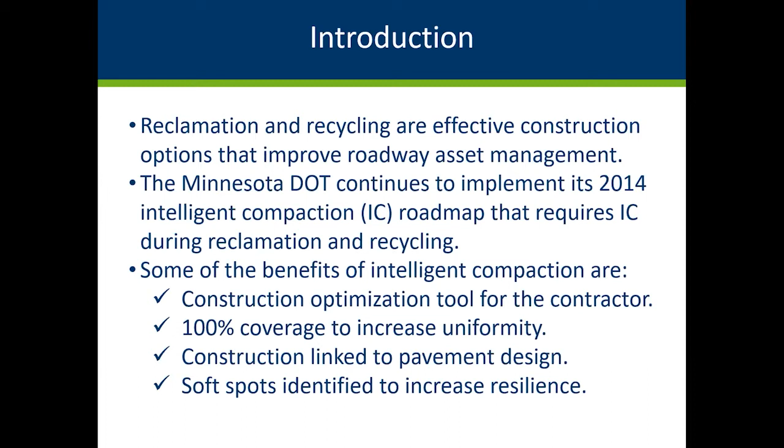The opportunities, I'll talk about six things, with a couple slides on each: eliminating unsafe testing, addressing national priorities, enhancing roadway resilience, demonstrating innovation, improving asset management, and increasing cost effectiveness. So what do I mean by unsafe testing?

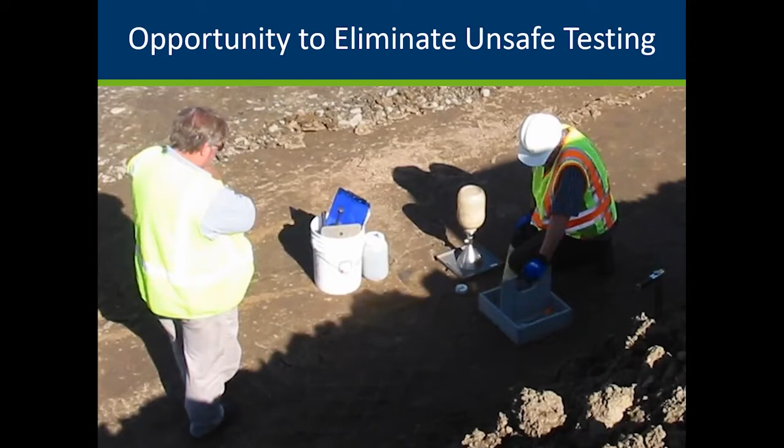When I first got involved with this a couple decades back, I had been doing construction testing as an intern during school, came to the DOT, and we were doing a lot of density tests. I was very familiar with these tests, and our construction engineer for the state of Minnesota was very interested in getting rid of, or at least providing options that would reduce the danger for inspectors doing these tests. We'd actually had inspectors, at least one killed and several injured, being down on the ground for many minutes doing this work. So a huge initiative was: can't we replace this unsafe testing? We in fact moved pretty fast and got that done, providing a couple options: the dynamic cone penetrometer and the lightweight deflectometer.

As far as addressing national priorities, all the DOTs have been actively working to address what was passed by Congress, MAP 21 in 2012, and subsequent federal highway bills have reinforced the need for measured outcomes that are performance-based. So what I'm going to speak about today are what tests, what processes can we put in place that are much more performance-based, linked to design, linked to long-term performance, and that's all essentially mandated by Congress.

And then by the rules that Federal Highways puts in place. The Society of Civil Engineers was already mentioned - they have professional standards as well as AASHTO. So all these important professional organizations are encouraging us to move expeditiously towards these goals. As far as asset management plans, we're familiar with the rules that have been adopted by Federal Highways that are posted in the Code of Federal Regulations.

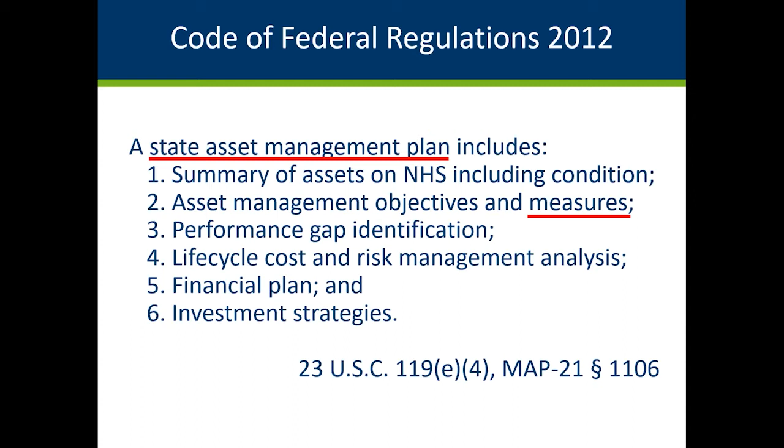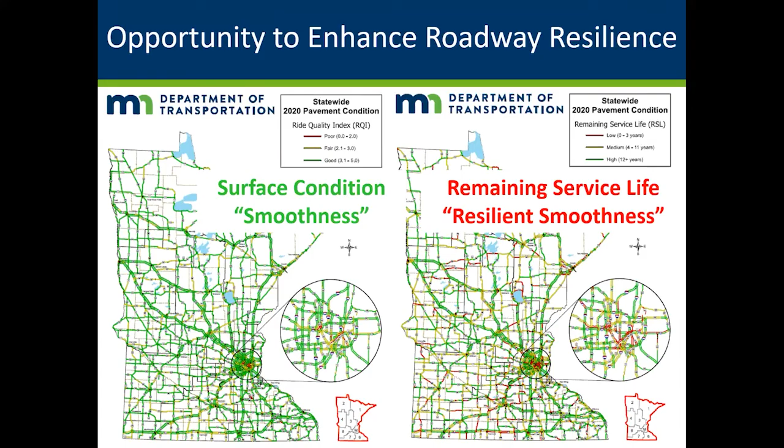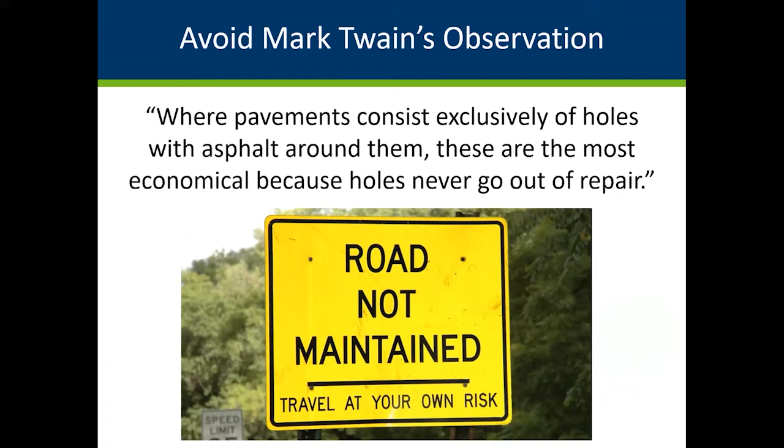Now, if we improve how we do things, build a better foundation, the expectation is we might be able to extend the remaining service life and gain years. That's sort of the vision.

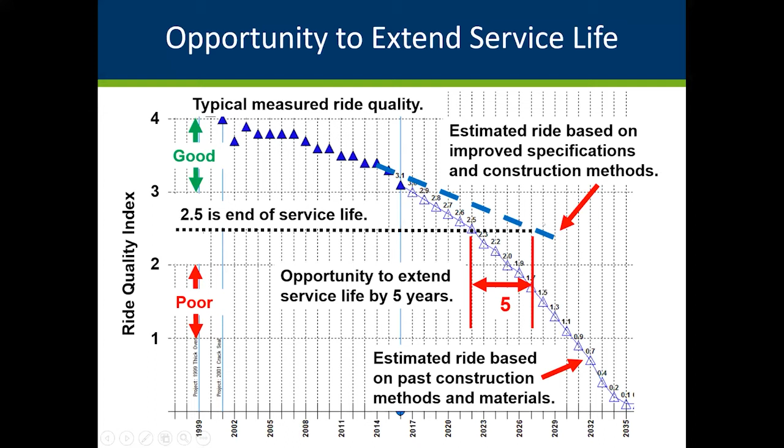And of course, besides building it right, it requires maintenance along the way. So we're working, making sure the surface does not fall apart, using proactive maintenance treatments.

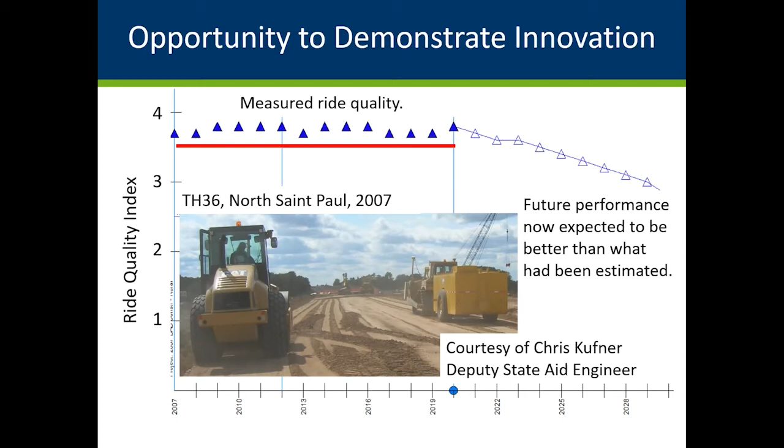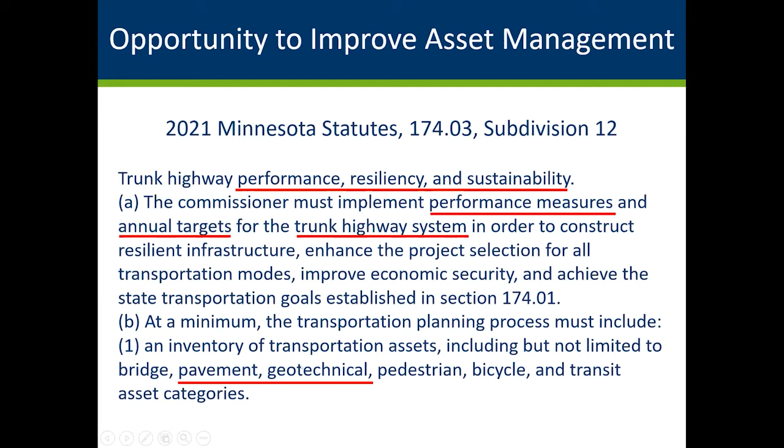The legislature in Minnesota is encouraging us to continue this work. They just passed a law this last few months, earlier this year, encouraging us to continue this process of better asset management, making it more clear that besides bridges and pavements, as required by federal legislation and rules, we have to include geotechnical - this would be all the pavement foundations and other work. So between pavement and geotechnical, we're certainly covering the roadway engineering.

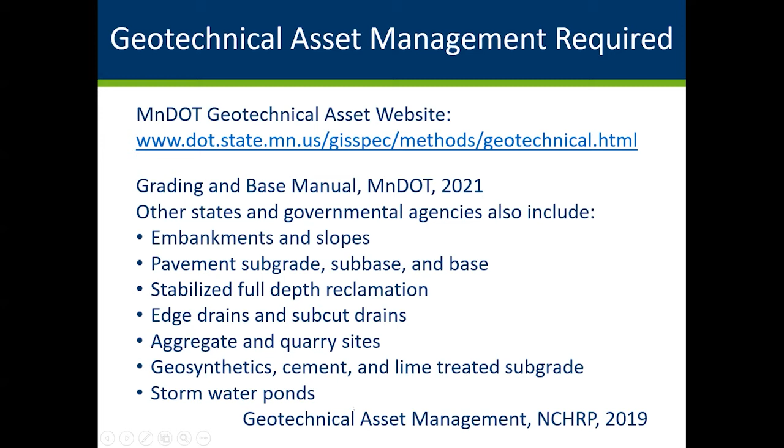If you're interested in learning more about geotechnical assets, many states are working on these. Here's the Minnesota DOT website, which talks about what we're currently doing with geotechnical assets. Our grading and base manual mentions other assets included by other states, and there's an NCHRP report produced a couple years back, in 2019, on geotechnical asset management. There's a manual and a report, so those are certainly great resources.

A little bit of history now, less than 5 minutes. I've been talking a lot about some innovative things, but if you go back and look at some of these tests we're all currently doing, either partially or completely, for instance, this density testing for compaction.

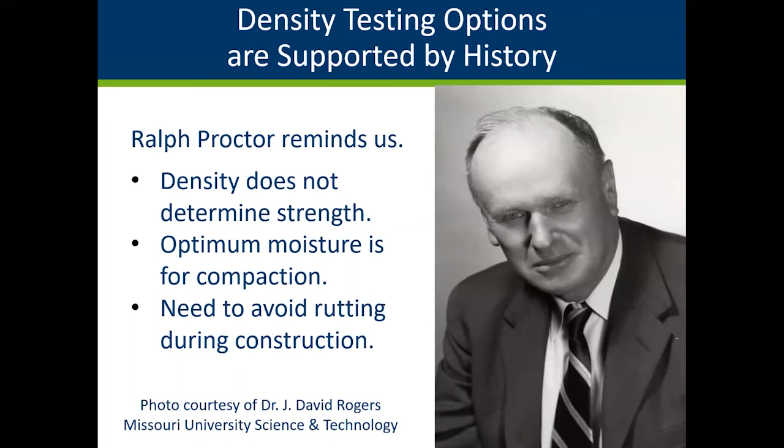I think many of us recall that these are typically referred to as Proctor tests, a laboratory test that's done. But essentially, the bottom line is that Ralph Proctor, an engineer building dams, big earthen dams out in California, did not use density. His focus was on strength and on construction, optimum moisture for compaction, and the desire to avoid rutting as he was trying to build these huge earthen embankments.

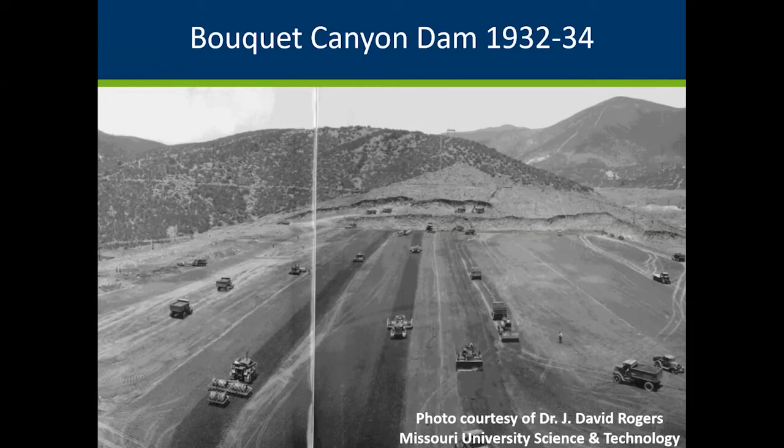And just a shout out to Missouri University of Science and Technology, Dr. Rogers there - these are slides and photos he's been using in his coursework, so thank you Dr. Rogers. But anyway, Proctor was building these huge earthen dams - you can see the type of equipment here - and he was not using density as a control measure. He was using a performance test.

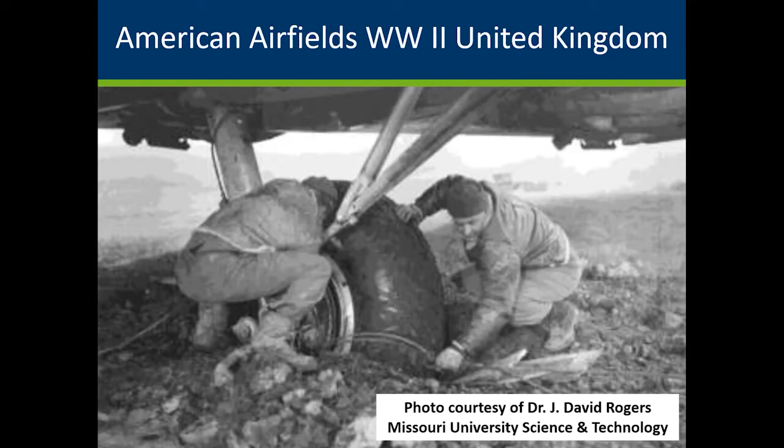Unfortunately, that message was not transmitted well. People went out there, ASTM went out and talked to Proctor, and essentially did not capture what he was doing. We ended up with a density kind of spec that really didn't represent what he was doing. And when we went into World War II, things went bad. We built runways, they fell apart, the Corps of Engineers got involved, and we ended up with what we call a modified Proctor test. That kind of got us through to the present time.

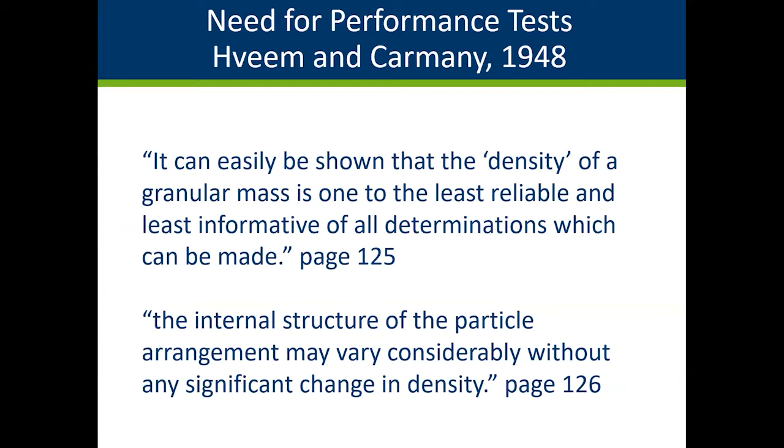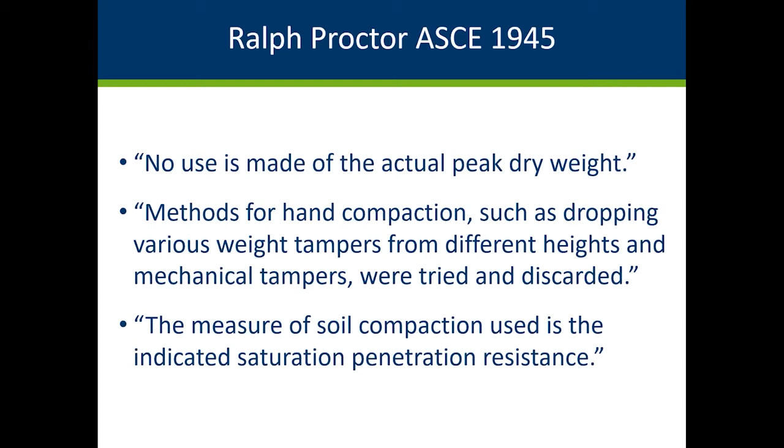So anyway, the history is pretty clear that we're just returning to what Proctor intended many decades ago. Again, this was in the 30s and 40s - he was succeeding in California, and we're nearly a century later trying to get back to what he was doing then. So anyway, no reason to be held up on tradition here.

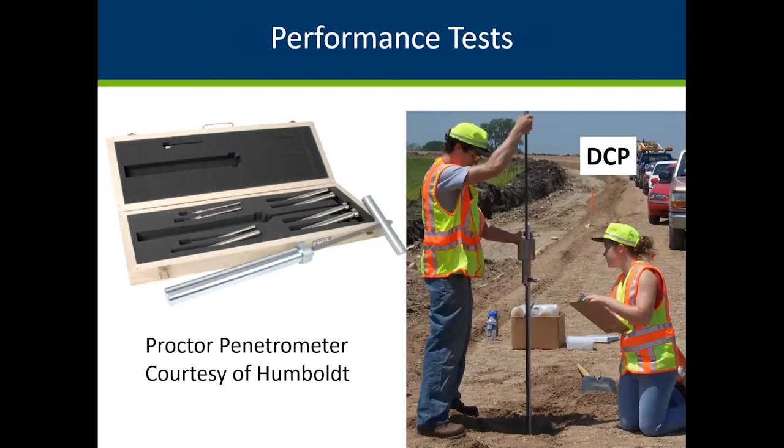So Proctor's penetrometer is on the left. The DOTs are implementing dynamic cone penetrometers in Minnesota, and many states around the country are using DCPs. We also allow the lightweight deflectometer - Indiana is another one. If you're looking for implementation of the lightweight deflectometer, the Indiana DOT has more than 100 LWDs between their staff and testing contractors. So they're certainly a resource.

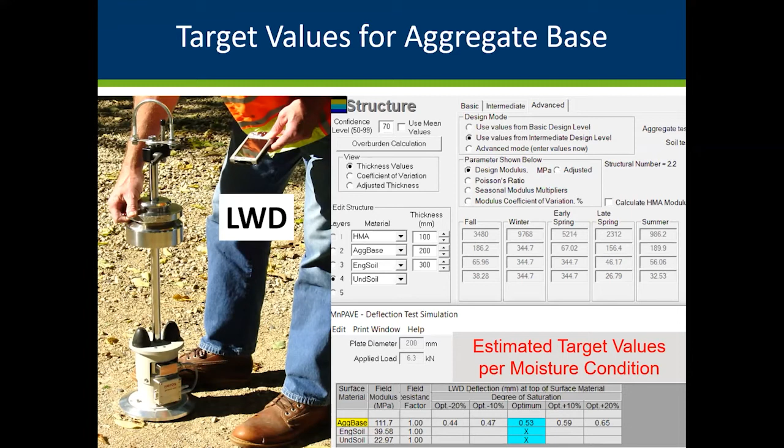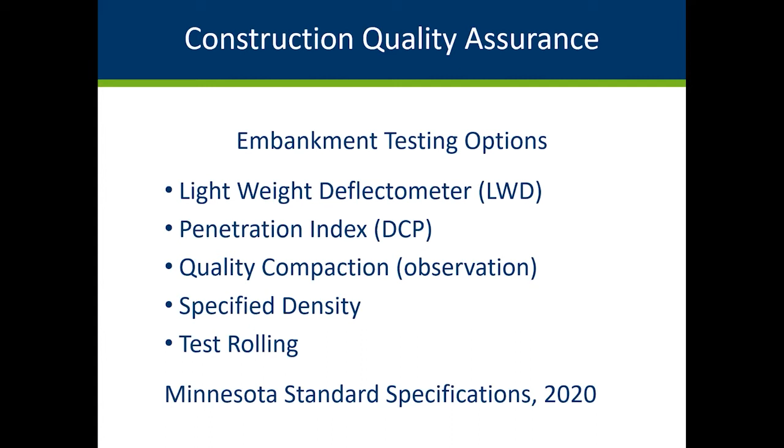So, options. As we're building roadways in Minnesota, when we're building the embankment, we provide a bunch of options for our inspection personnel - they can select between the designer and the inspectors. They can either use the lightweight deflectometer, the DCP, or quality compaction, which is if we have full-time inspection, which is very rare, then we don't do a lot of tests. We have a person there who knows the proper procedures, knows how much compaction is needed, so the testing is very minimal because we have eyes on the ground with the experience to know things are done well. And we have test rolling, and we still have density.

By way of intelligent compaction, here's a slide - I think a great slide, very clear - from our partners at the University of Texas, El Paso. It shows the roller in the middle, and these intelligent compaction rollers - as I mentioned, the operator has a screen in the upper left where they can see immediately how the roller is behaving with respect to the ground, through the measurement of the drum in the lower left.

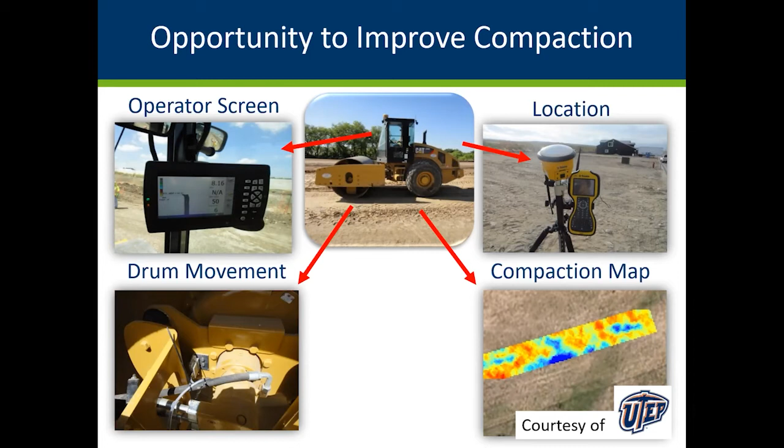The upper right sort of points out that these rollers are either tied to satellites or to ground base stations, and that puts all these measurements on a map, lower right, both immediately to the operator and then, of course, stored long-term for quality assurance purposes.

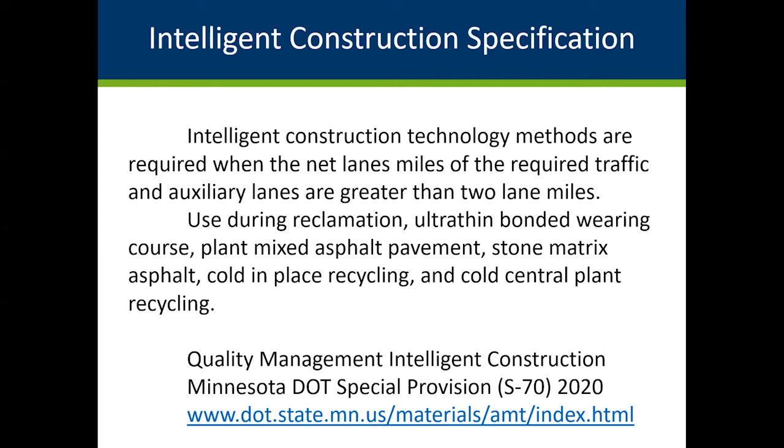Here's the current Minnesota version of the intelligent construction technology specification. On every asphalt job greater than 2 lane miles, so anything of any consequence, intelligent compaction and thermal profiling is now required. The materials are listed here: reclamation, ultra thins, hot mix asphalt, stone matrix asphalt, cold in place recycling, and cold central plant. So not all the foundation yet, but we're slowly but surely picking up all the foundation layers.

Again, these partners around the country are doing great work. Here's the University of Texas, El Paso. A recent report from just last year ties the intelligent construction compaction measurements to the mechanical properties used in design, a great resource for those that want to learn more about this.

Another huge thing is moisture content. We all understand that compacted materials have to be at the correct moisture, and we've been at this along with other DOTs for many decades. It started with a huge amount of work by Jill back in 1998, her thesis on seasonal properties during pavement design and how they perform over the long term. Then Ruth in the mid-2000s really got into unsaturated geomechanics, and there were a couple of NCHRP reports, an IDEA project, and then the full-blown NCHRP report that cover these things.

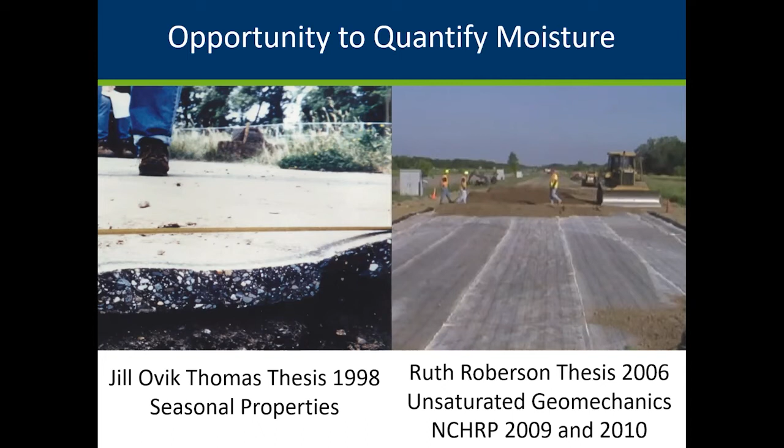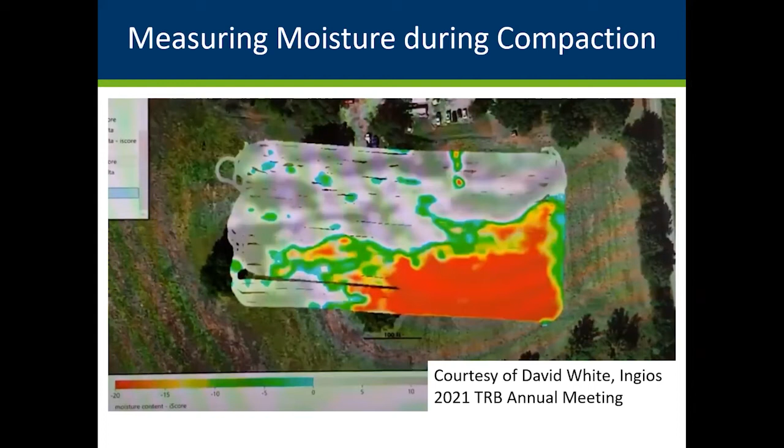So again, you can contact me, Google this stuff, there's a lot of work. Currently with moisture, we've got these compactors, and people like Dr. David White and his company Ingios. Here's a slide from earlier this year at the TRB annual meeting, where he's mapping moisture content during construction. So again, all these technologies that are out there, people are using them.

It's all very doable. Why? Because we're hoping to increase cost effectiveness. We've been at this for a couple of decades, like many of you, developing better material tests. We understand that using mechanistic pavement design and mechanistic testing is going to help us fine tune and enhance pavement performance and build things more effectively.

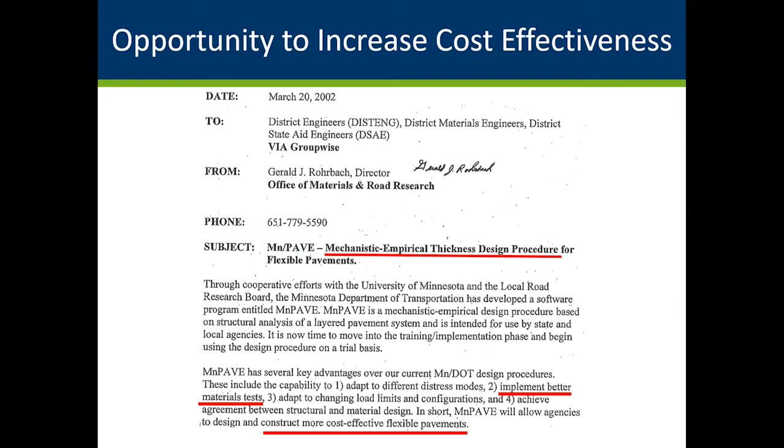With all this in mind, of course, I'm a geotech pavement foundations guy, kind of a rock and soil guy, and I appreciate this quote very much from Richard Handy a few decades back: virtually every structure is supported on soils, and those which are not either float or they fall over. So we're happy to try to build these foundations more efficiently, and hopefully the roads last much longer.

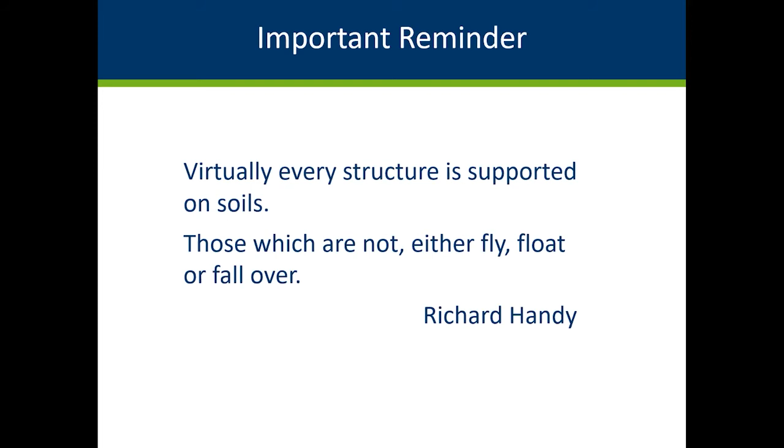So I've got a couple of examples, I'll get through these. I think we're pretty much on track. I'll wrap this up within 10 minutes or less, have to take some questions. So yeah, we're fine, we're fine, Jim.

Okay, thank you. So the first construction example is, again, there's going to be two of them here. Both are full depth, stabilized full depth reclamation. The first one we built in 2019.

The soils out there were a mixture of sand, silt, and clay. Minnesota is largely glaciated, so this was a glacial terrain. The existing base material was approximately 4 inches, but it got difficult to even find in some places, and the existing asphalt ranged from 6 to as much as 15 inches. This is about a 10 or 12 mile piece of trunk highway that had been there for many decades, and there'd been a significant amount of overlaying, so we had huge differences in the asphalt thickness.

We went out there, milled off 3 inches, set that aside so we could recycle it, and then reclaimed everything else. So whether it was 3 inches left or 12 inches left, that all got ground up with the idea that we would mix the ground up asphalt and the underlying base materials back together, then stabilize 6 inches and pave 4 inches of new asphalt.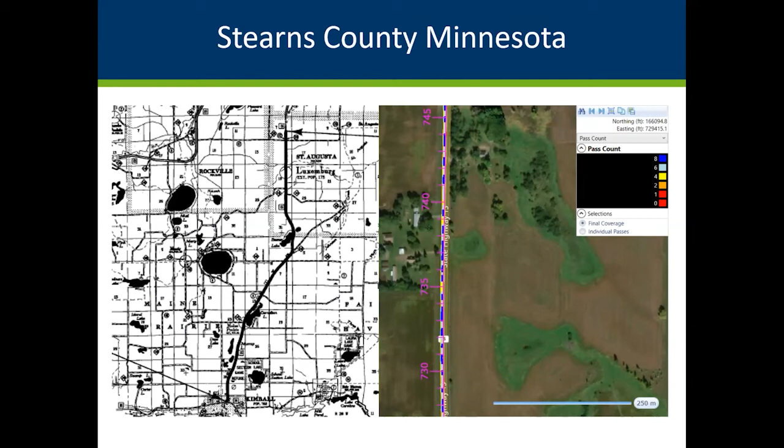As far as the mix design goes, we had cores all the way along this, not a huge number, but we had around 40 spaced all up and down the project. That's how we knew we had that variation in asphalt thickness. The idea was to blend the ground up materials into about 80% RAP, 20% aggregate base, mix in 1% cement and 2% asphalt binder, and build this new road.

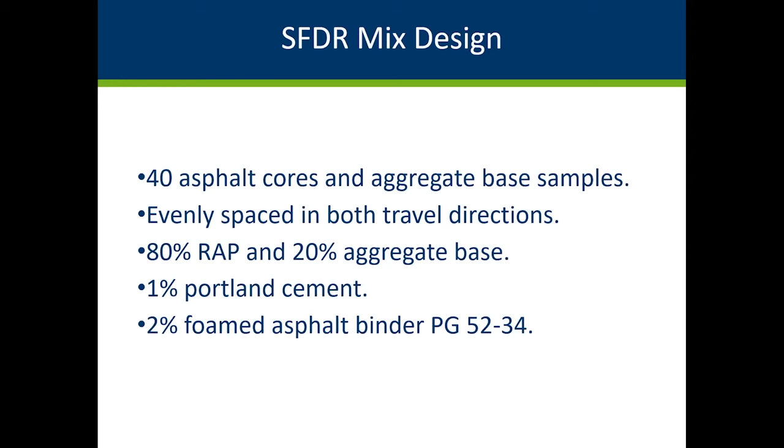So that's of course somewhat of a challenge to get these mixes right, but that was the goal. We had to adjust some of these quantities on the way, depending on how this mixture actually worked out. But bottom line is everything was good during construction. Things looked great, no problems.

We had 3 different rollers out there: the pad foot roller, the pneumatic rubber tired roller, and the double drum steel roller. So those 3 rollers were compacting the stabilized full depth reclamation.

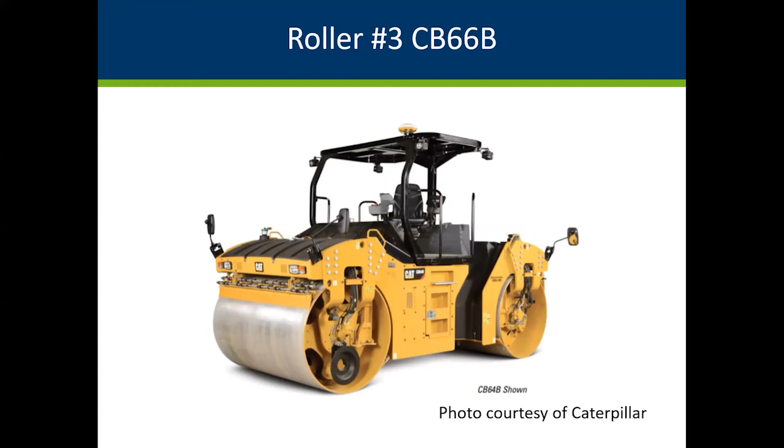In order to look at all this information, we have this Veta software, and this is free now. We're still building it, you're welcome to join us. We're constantly improving the capabilities of this software, but right now it's available. You can either Google Veta, or go to the Federal Highways website and click on more information. You can download the current version, and this will allow you to import the contractor's data from the rollers, and then display all these different measurements, create these maps, and create all these asset records.

So the upper left is actually the measurement. The amplitude is measured. The upper right is pass count, so we know how many passes of every roller. The lower right is speed, roller forward and backwards at every point. And another example, lower left is this Trimble proprietary stiffness value. Different manufacturers have different stiffness values, but the point is that we know we have a measurement, the actual amplitude of the drum, and we have location of the roller.

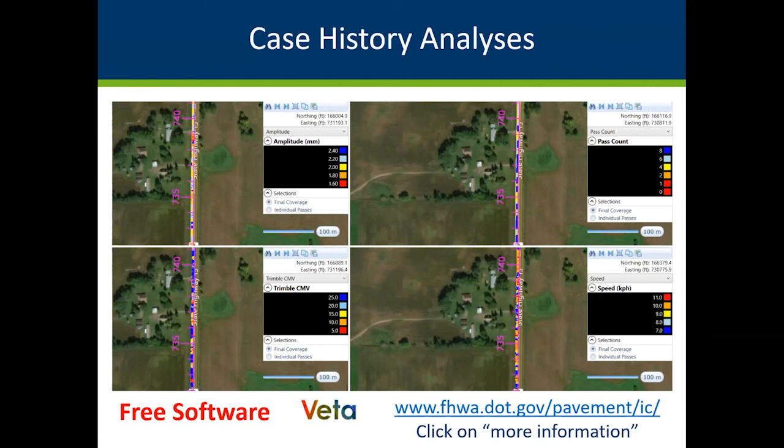All this is good. And what I'm going to show in the next couple of figures only comes from the pad foot roller. So there's all these rollers, all these measurements, every foot of 12 miles, but you can crush through all that information using this software. Here's just a couple examples.

This is a compaction curve for the map shown above. In this particular example, I carved this up so that these segments are only 25 feet long. You could be any length you want, but I carved up this 12 miles into 25-foot pieces, and then you can generate a compaction curve for every one of these pieces. This is just one of dozens of things you could do.

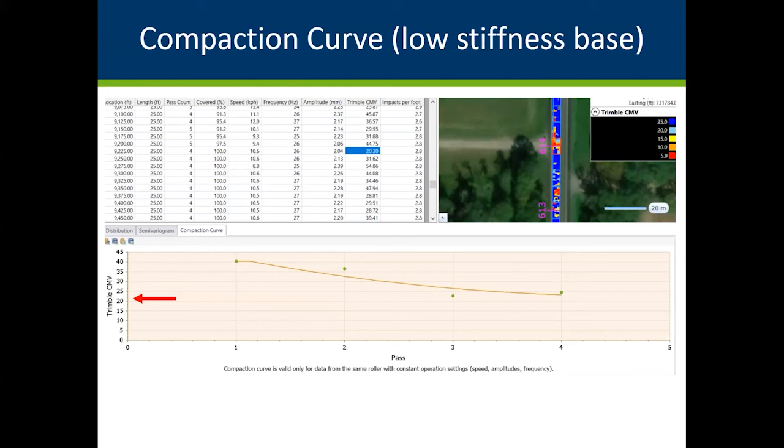But here's an example. This place, unfortunately what happened here is we started compacting it and it goes down. That's not good, of course. The map shows red, so this would be a questionable area. Now, the roller operator is also seeing the map, and they're seeing that this area could be red.

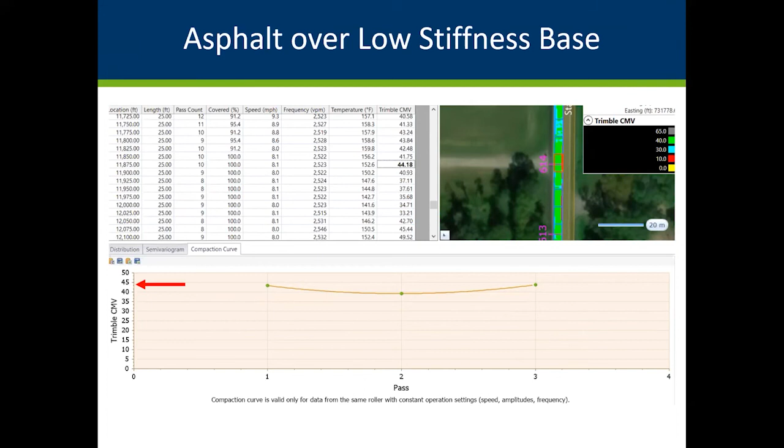Now, unfortunately, if we don't fix this spot, here's the asphalt that was put on there many weeks later, and this is unfortunately not a good number. This index, this value of sort of 40, 45 on the left where that arrow is, is not typical. The rest of the job is much higher, much higher. The rest of the job looks more like this, double that.

So the asphalt typically has a stiffness like this. This is what we would expect. Unfortunately, we're not getting that. So that area is a place that should have been corrected.

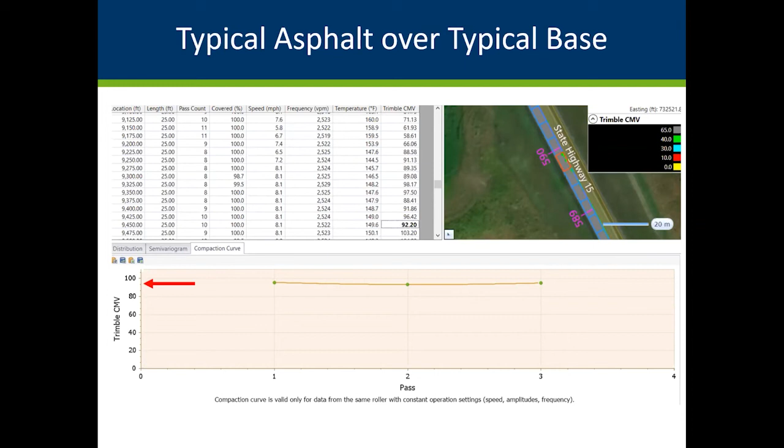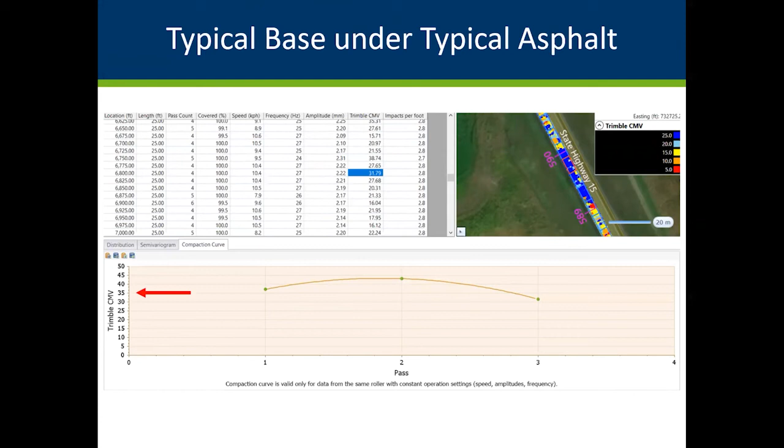Now here is the base under that good asphalt. The value here of that stabilized full depth is around 35 or 40. We got a compaction curve that looks reasonable. The other one clearly was not good. So we want to see something like this. Much of the project looked like this. That's why it performed relatively well, looked great during construction.

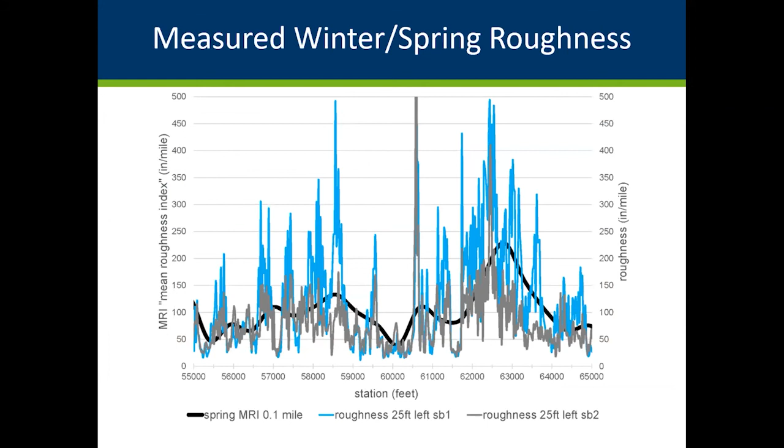Now what happened was the operator, even though everybody thought they were doing a great job, they were systematically, when they would reverse directions, turning the vibration off and then restarting it. What happened was they unknowingly created a huge amount of differential compaction, which didn't show up immediately. It showed up during the winter due to the apparent effects of the moisture.

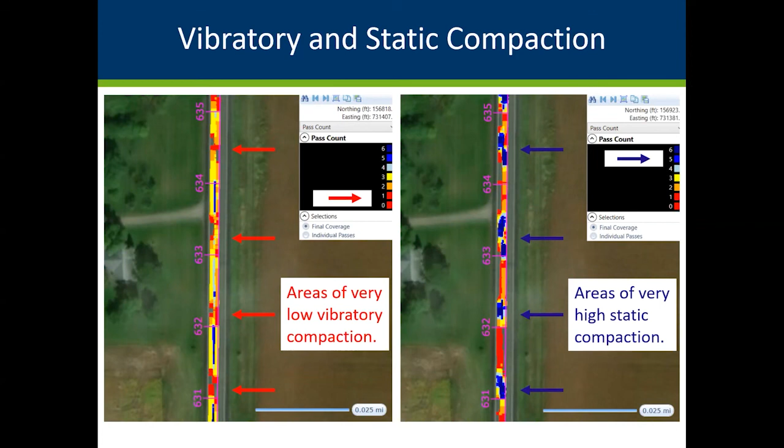The water table is relatively high. We seem to have pumped water up into the grade and then froze it. When we looked, if you compare the measurements of roughness to the measurements of this differential compaction, we see a lot of problems. There's not every spot, but there's this correlation between where we have high differential compaction, we have roughness.

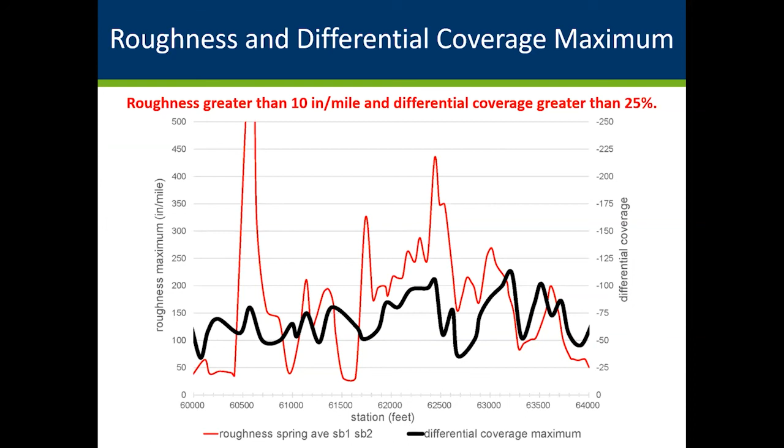And so we learned from that experience, and we've made it clear to the contractors that they need to avoid this differential compaction, which everybody essentially understands, but they were happy to do better the next time.

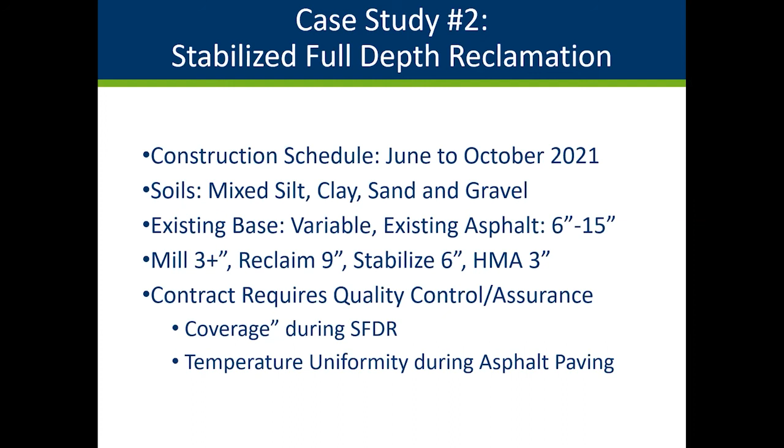And we then used intelligent compaction. Again, it's required for every stabilized full depth job in Minnesota. So the intelligent compaction was used. Here's an example that when we got started, the design did not call for reclaiming the shoulders.

And so what happened was, this was just the first couple of days, we found that, and you might not be surprised by this, but because the main line was very deep, we had reclaimed a lot of material, and it turned out early in this, it was actually raining here earlier in the season. They had trouble compacting because the roller would bridge. It would ride partly on the shoulder.

The contractor and the DOT personnel on this job said, we got to do something. They in fact decided to mill and reclaim the shoulders to create a much more uniform foundation. We solved this problem, and we're hoping that we measure the results of this project over the next few years and decades will be much better. So we were able to, again, mitigate this problem during construction.

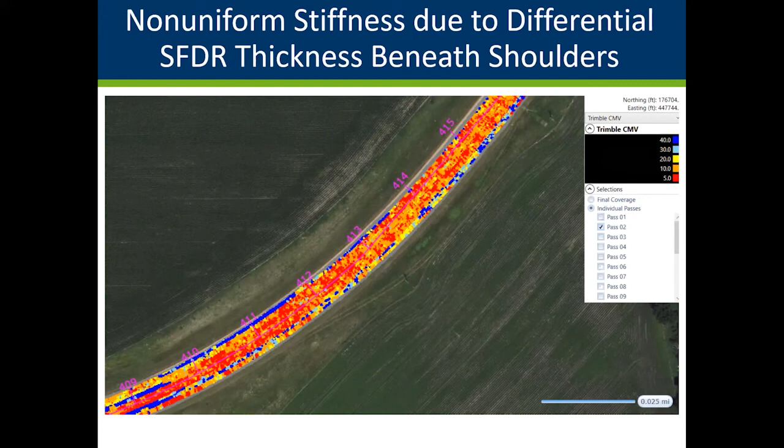To wrap up, lessons learned are basically these tools: the dynamic cone penetrometer, lightweight deflectometer, intelligent compaction, are very effective construction tools. They help our contractors and our inspectors construct long-lasting, more resilient roadways. We continue this implementation so that people's investments are well spent here. We are really happy to share any of these specifications with anyone on this call or in the future. The training videos we've got for this Veta software, again, we have to train all our inspectors, so we've got a huge amount of information, and we're just really happy to share any of that with anyone who's interested. So thanks again for listening.

Thank you, John. I have a question here from Alexander Mann that says, are you aware of seismic surface wave analysis in the use of strength testing of soils and compaction?

Somewhat, not as much as I'd like to be, but we actually have a current project that's looking more into using seismic, surface seismic measurements. You can again contact me, we'll plug you into the project, but currently we're looking more at that. Yes, okay, that's another option.